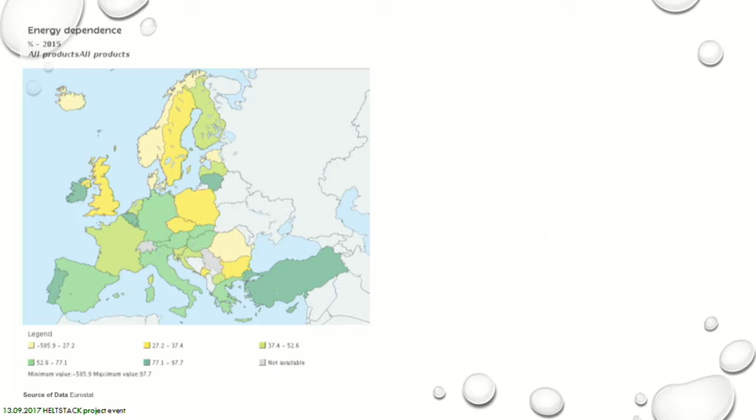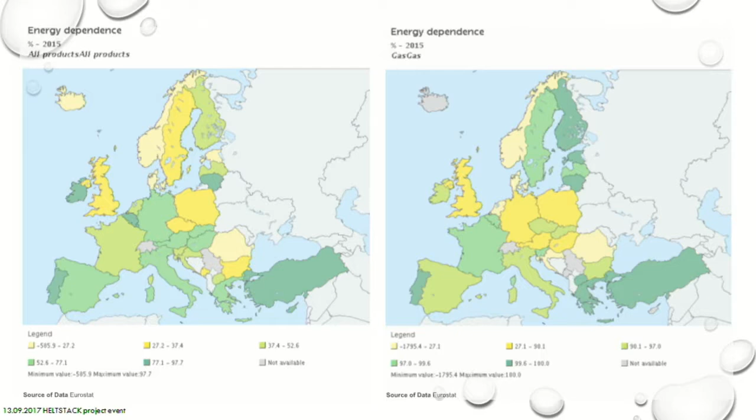But it changes quite drastically when you look at how it looks with natural gas, for example. I'm bringing in natural gas because if you want a little bit cleaner environment with existing technologies, you can get it, but the dependency highly goes up, mainly because of this picture. So this is very, very bad.

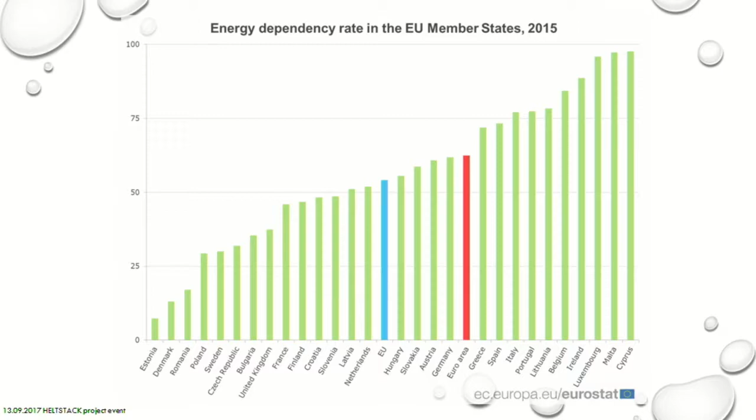Or is it possible? Because this is Europe in general. You can see Estonia, we are in pretty good shape, only about 7%. We depend on energy import. Europe's average is around 53%, Eurozone about 60%. So about half is what we are depending on imported primary energy.

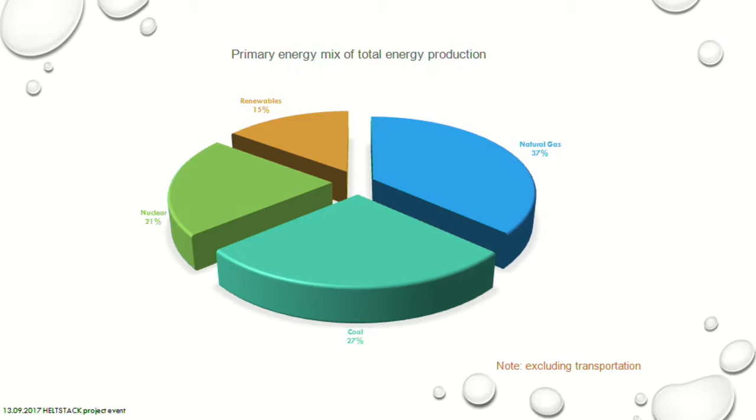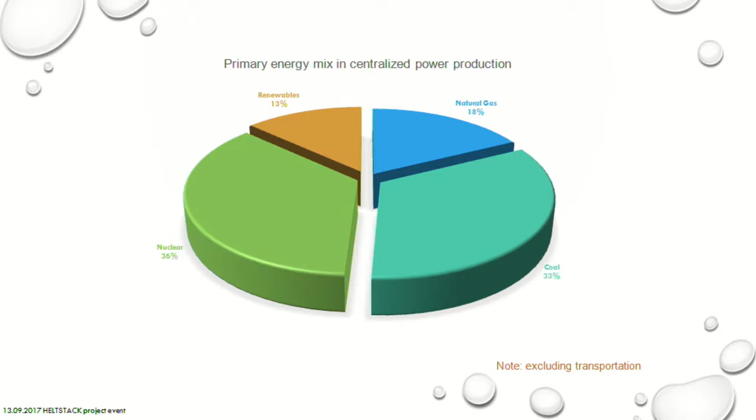But if we go back to this energy flow chart and look specifically at how electricity is produced, most of electricity is currently produced in centralized big power plants and delivered to customers through the electricity grid. In centralized energy production, we see a little bit different primary energy mix where coal and nuclear are quite equal, and natural gas and renewables a little bit less, but also quite equal in the picture.

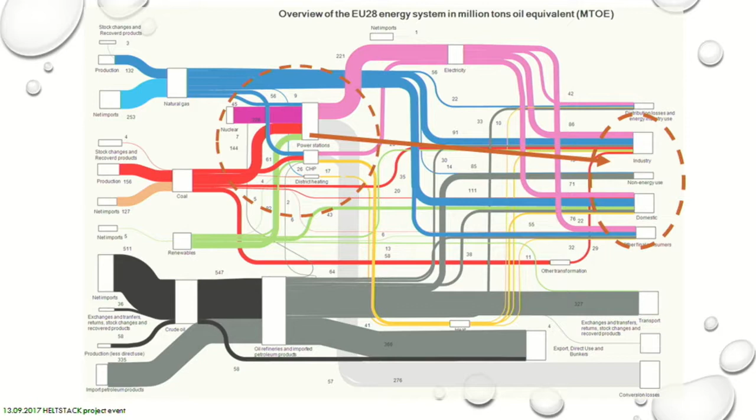If we go back to this same EU 28 energy mix and look at how much of this centrally produced energy is received by end users or customers, we can see that about over 60% of primary energy is just lost somewhere in between. So all these centralized systems are highly inefficient as they are now.

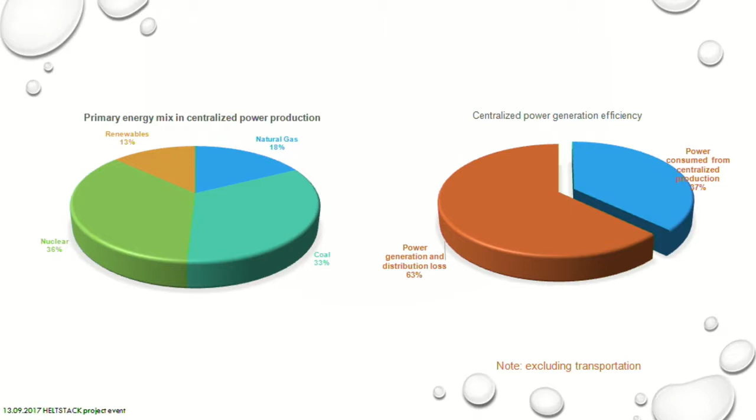But if you look at different countries, Germany, for example, which is the largest energy consumer in Europe, the energy mix is different than Europe total, but total efficiency is also below 40%. It's about 38%, and the share of renewables quite small.

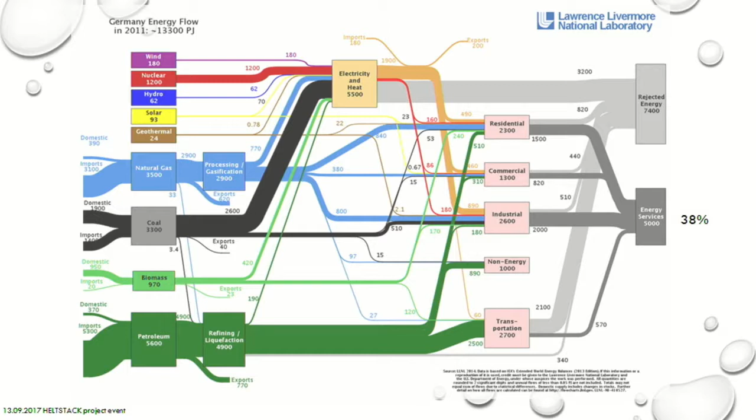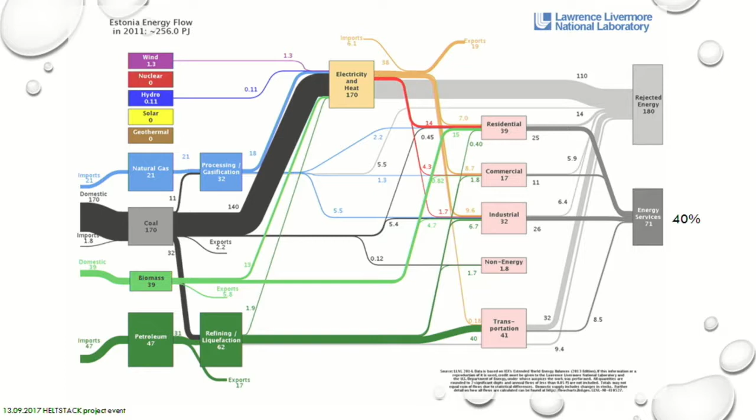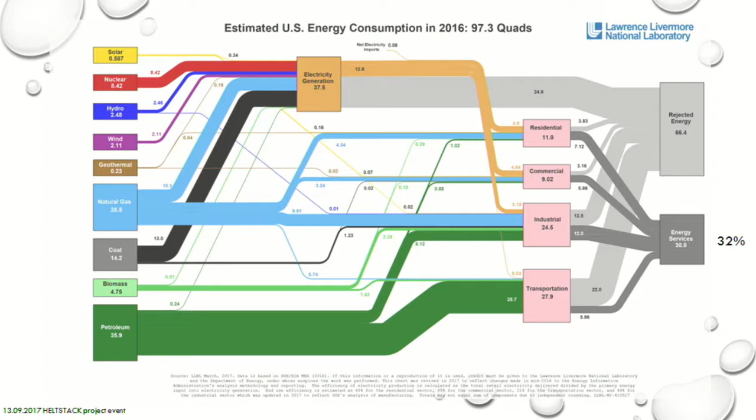This is the US, for example, extremely low, and from transportation you can see how much is flowing in and how much is really actually used. It looks very bad, and this is only due to extremely low efficiency of the system, which means you have to input a lot of energy, a lot of primary energy, the majority imported from unstable parts of the world.

So global demand is growing. Whatever we are doing, we can conserve energy, we can take measures as individuals, as a society, but still society is electrifying, and mainly you can see the growth from non-OECD countries, developing countries like China and India, where energy consumption is growing heavily. Close to 50% is the predicted global power demand growth between now and 2040.

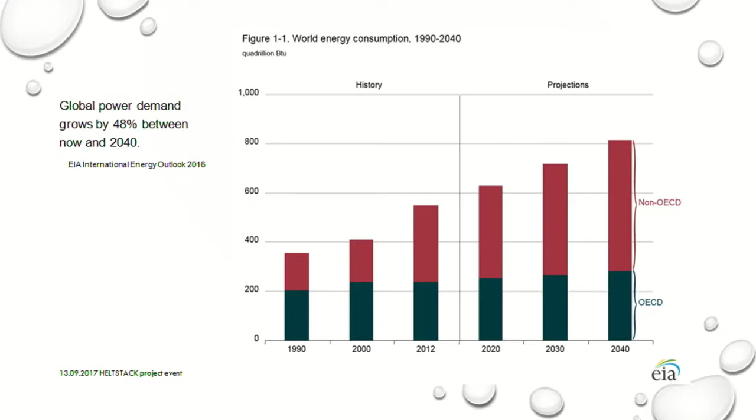If we continue to run these inefficient systems, I think we will soon meet some kind of a very bad crisis. So what can we do? I think something that can save us here, so to say, is to decrease primary energy consumption just by increasing power conversion efficiency. It's actually the only way to reduce primary energy usage.

Robert earlier also showed some efficiency percentages of different generation technologies. Here it's graphically shown, so you can see that fuel cells are really the most efficient technology to convert primary energy to secondary electricity or heat. And from fuel cells you can clearly see that solid oxide fuel cells have the highest efficiency at the system level, not depending on the power range. You can run small systems under 1 kilowatt, or 100, 200 kilowatt systems, or even bigger, at the same high efficiency.

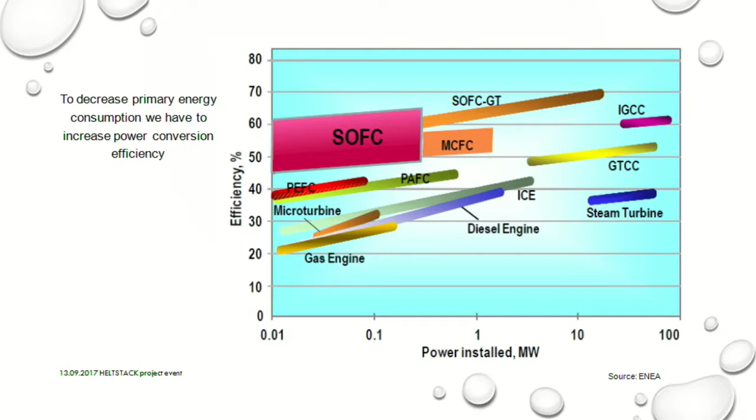Of course, these combined cycle power plants can run close to the same efficiency, but again they are centralized, and then we have grid issues. If we have a power outage, usually this is not a problem from the production side, it's always about the grid. But if you produce power locally, the gas grid practically never fails, so you always have fuel available for local power production.

So this is one illustration of what the difference actually is, and where the losses are at the system level if you compare an internal combustion engine, for example, to the fuel cell system. You can clearly see, a pretty good visual picture, how much primary energy, gasoline or natural gas, you have to put in, and how much useful electricity and heat you get out, and the difference is huge.

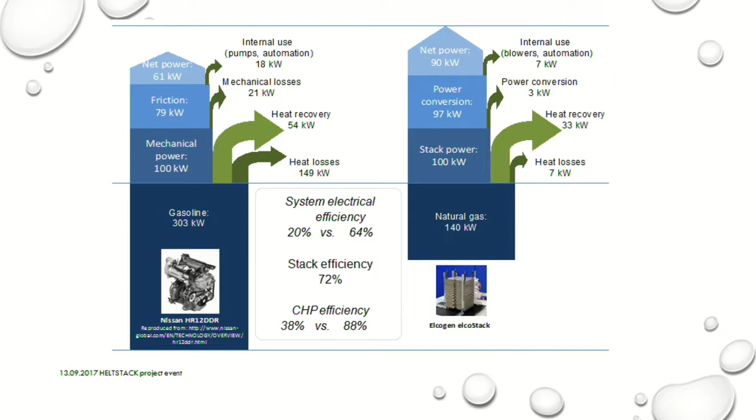Here we're talking about distributed generation. For fuel cells, as has been mentioned earlier, we have a lot of different applications where we can use them. These are small residential micro CHP units for a family, one-family houses, apartment houses, in different power ranges.

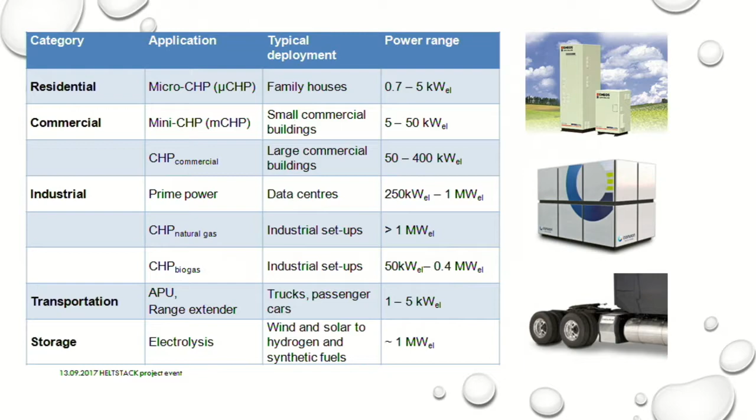And of course transportation, because the efficiency of a transportation system currently is extremely low, even lower than power production. This is something we have to address, and there are several possibilities using PEM fuel cells as the main power source for electric vehicles, or also SOFC, high temperature fuel cells, as range extenders or auxiliary power units for trucks or passenger vehicles. And of course storage, because hydrogen, as discussed earlier, is the most efficient way to store energy, but I'll come to that later.

But it's not only about efficiency, it's also about air quality. As was discussed earlier, fuel cell power plants are virtually emission-free. Even if you use natural gas as fuel, you emit about 2 to 3 times less CO2, and other emissions like NOx or particulates are practically zero, which is a very great contribution to our environment.

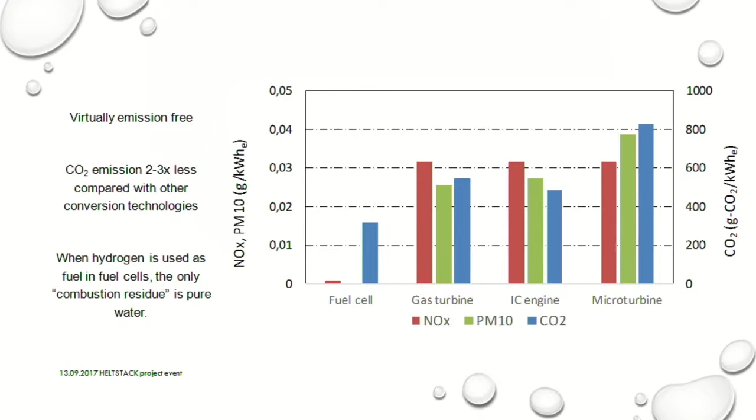And talking about clean air, we have to address also renewables like wind and solar. What we have seen in wind and solar is that this is growing and growing very fast. There are some expectations of how fast it will grow, and always some doubts, is it really growing so fast as we are thinking? But if you look back in history, actually both solar and wind have grown much faster than predicted, and it has always been so.

For example, here we can see it was predicted about 440 gigawatts installed cumulative in the whole world by 2020. But actually in China alone, already today it's close to 120 gigawatts installed, and this year already close to 40 gigawatts, only this year. So it grows extremely fast in China, and China has already now fulfilled their 5-year plan target for 2020 - it's already done by today. It's going very, very, very fast, and the same happens with wind.

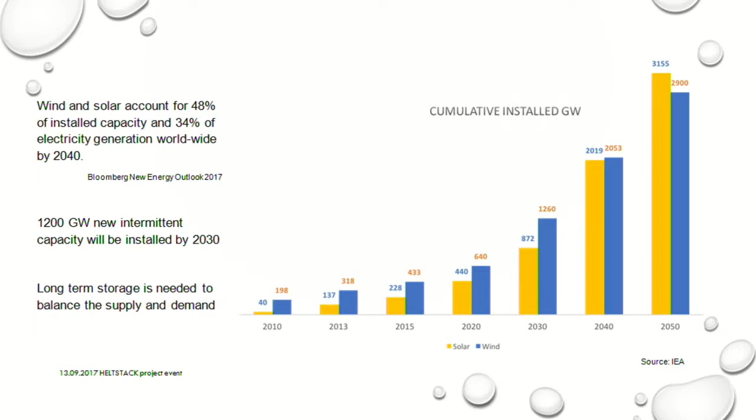And imagine by this graph, you can see that about 1.2 terawatts of intermittent capacity will be installed by 2030. But already now, the grid in some areas does not accept wind. So what should we do? We should find the best way for storage.

This is a pretty good illustration of how we can store energy. We have different storage technologies which are mature, we know them, but they all have some kind of limitations. Supercaps are excellent for instant storage. Batteries, we know all batteries, but we can't store in batteries for a long term, and of course we can go quite big with batteries, but again it's not very efficient. Compressed air, pumped hydro is also very good, it's mechanical, you can use it for very big capacities, but again not very flexible. So here you can clearly see that if you really want to store for a long term with high efficiency, you have to store it as hydrogen.

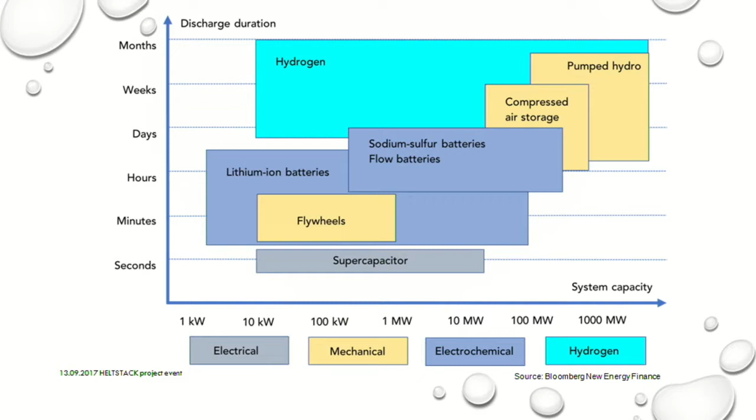If we talk about hydrogen production, then electrolyzer is one of the ways to produce hydrogen from excess power. But there are also different fuel cell systems which can act as electrolyzers, so fuel cells can not only produce electricity, but they also can produce hydrogen from electricity. Low temperature fuel cells like PEM water electrolyzers or alkaline electrolyzers, which are especially quite established technology already, can produce 1 cubic meter of hydrogen using 4 to 6 kilowatt hours.

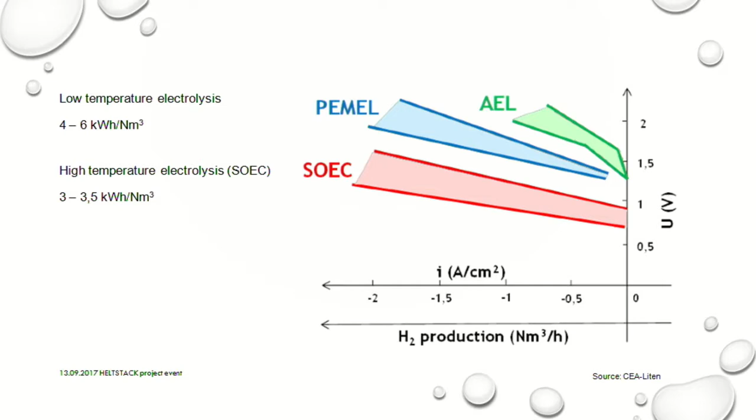But when you go higher with the temperature, in case of solid oxide electrolysis, you can bring the energy use down to 3 kilowatt hours per cubic meter. So this is again efficiency.

And also graphically here about how to use this hydrogen - it's not only to store, but in some cases you can use it immediately for transportation, for example, or to produce synthetic fuels, or in chemical industry. So it's actually an endless way of using hydrogen, not only storing and producing electricity back when needed.

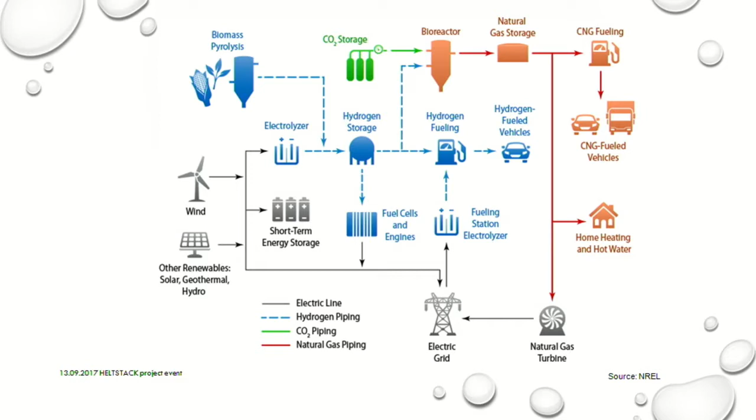So to conclude this part of the presentation, I will come back to this very wise scientist I referred to this morning, and show again these nice quotations from the book about what Ostwald has told about fuel cells and how fuel cells really are the most efficient way of producing electricity or converting energy.

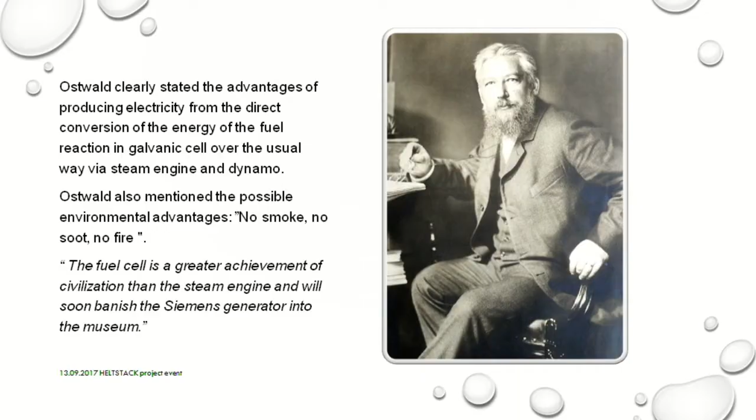Using this possibility, I would also like to present briefly what we are doing here in Estonia in terms of fuel cells. At Elcogen, we have worked with fuel cells already for 16 years. The last 5 years we have been commercial, so we sell our products currently to about 60 customers worldwide.

We see clear demand and growth of this demand from our customer side, so we are now planning to increase our cell manufacturing and stack manufacturing capacity in the next 4 to 5 years. And really we have put a lot of manpower into this research, so basically we can count about 350 man-years of research that we have done.

And currently this is again our customer feedback - the best technology available currently in the world. And this is also reflected here, so basically about 65% of our products currently is going to the Japanese market.

So from Europe, we can really serve other areas as well, with this great knowledge that we have here in Europe, also created by using this very good funding of instruments from EU, which has been discussed earlier in presentations. We really hope that this funding will continue, because now we are in a very nice situation.

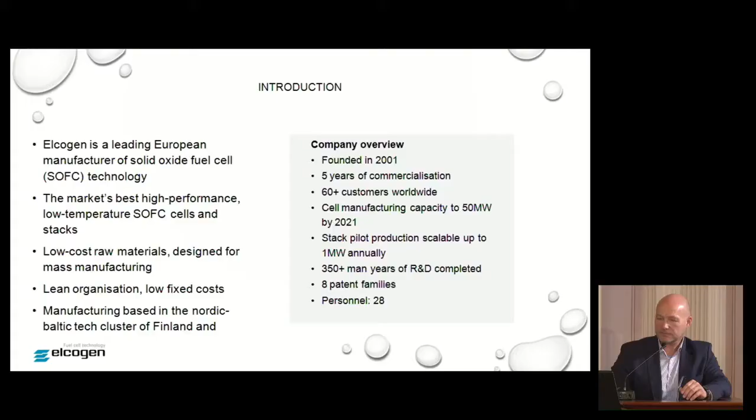So what we are doing here, we are not producing fuel cell systems. Our product is a fuel cell stack or single unit cells where the actual power conversion process takes place. And we are currently the only company in the world who really can produce ceramic cells operating at 650 degrees C.

And why this 650 degrees is important - we can use industrial grade, low cost materials at stack and system level. This is one thing which helps to bring the system cost down to the required level, and also enables longer lifetime of a system.

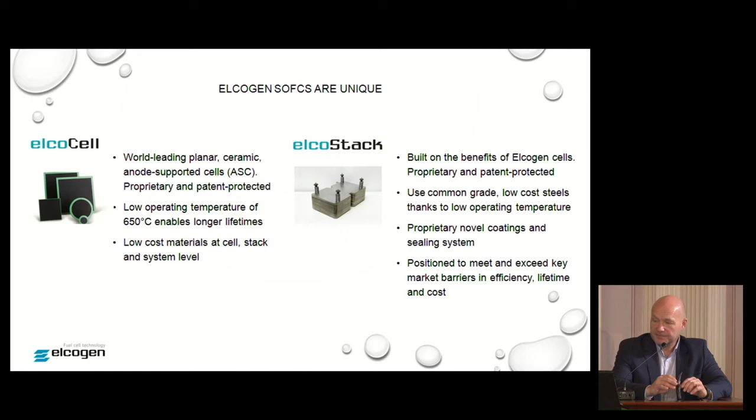And this is actually this holy triangle we are addressing: efficiency, cost, and lifetime. We believe that by lowering the operating temperature of solid oxide fuel cell technology, which is the most efficient energy conversion technology, we can really achieve all of these, especially cost targets, which we expect to be as low as 500 euros per kilowatt in mass manufacturing. Lifetime of 40,000 hours we have already confirmed by our tests, about 9,000 hours, and efficiency also at stack level is confirmed during 2 EU projects which we have done.

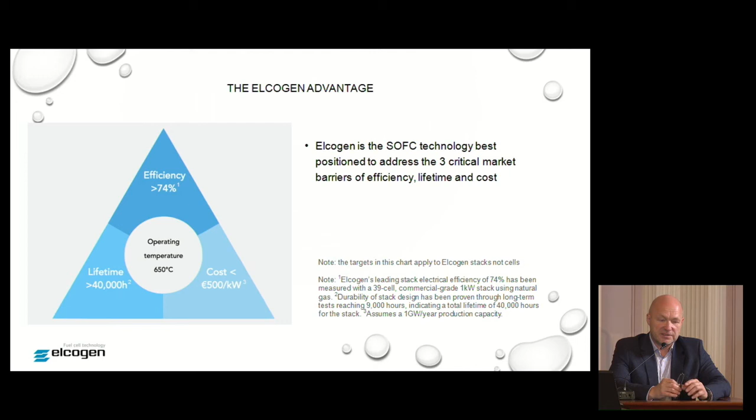And it actually the same value is measured in 2 different research institutions. So this is a stack level conversion efficiency from the natural gas lower heating value, and this is electrical efficiency, not overall efficiency. So this, we think, currently, as we know, is a world record in energy conversion efficiency.

And it was also discussed earlier that there are several applications, and our customers are also currently in different applications. We serve residential and micro CHP as well as industrial CHP, and also a few customers in automotive industry and also in power storage.